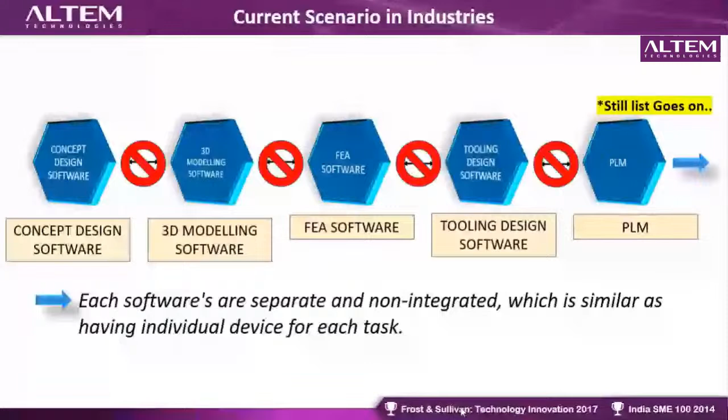There was a separate software for concept design, separate software for 3D modeling, separate software for FEA, which were not interconnected with each other. Now, because of this 3D Experience platform, which has been developed by Dassault Systèmes, all the softwares can be integrated, and all the departments in the companies can work in a collaborative manner to design the products faster and get the product out in the market as soon as possible.

Before the introduction of 3D Experience, all the products were available as a single software to the customers. Now imagine a company like Ashok Leyland or Tata or any of the major OEMs. They had purchased, say, 50 licenses of Catia for design, 25 licenses of Simulia for simulation, and say X number of licenses of Delmia. Each one of them was not interconnected, and they were working in individual silos. So collaboration between the different teams was a huge challenge.

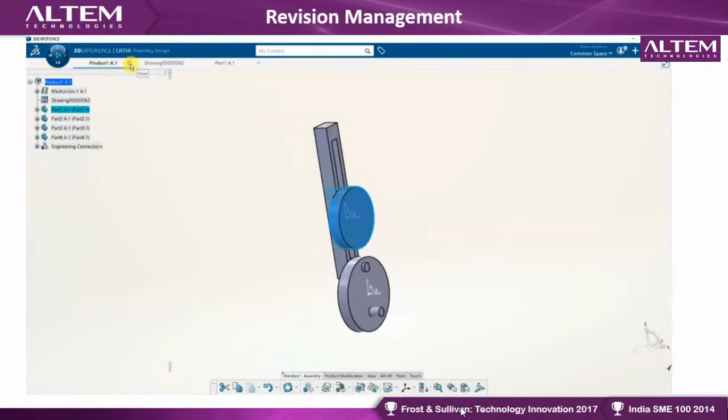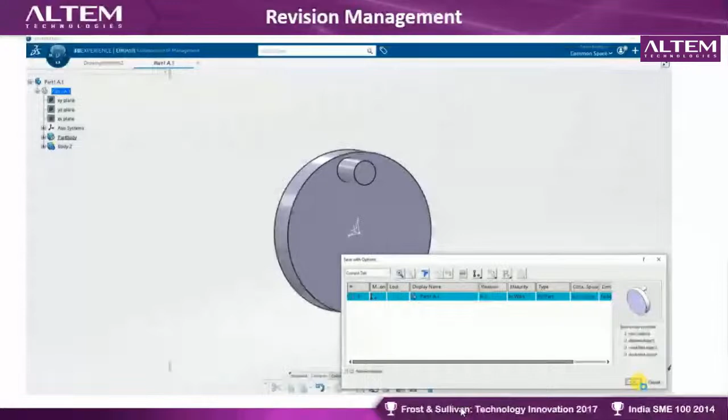By default in 3D Experience, the revision is set for a new part as A.1. The A is the major revision, 1 is the minor revision, and it is reflected in the draft, in the BOM, in the drafting. Now, if we need to do any changes to the part once it is released, we need to do the changes via revision management in any PLM. Here I want to change the diameter of this particular part, so I will do it via revision management, where I will change the revision of the part from A.1 to B.1.

As you can see on the screen, the methodology is how it is being done. Now the revision is changed from A.1 to B.1, and I am doing the necessary design change.

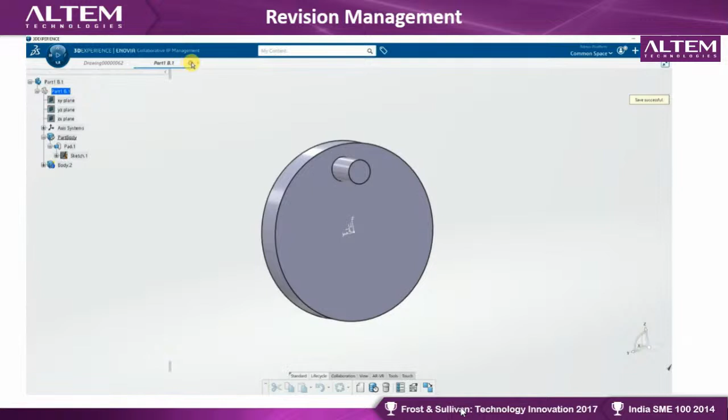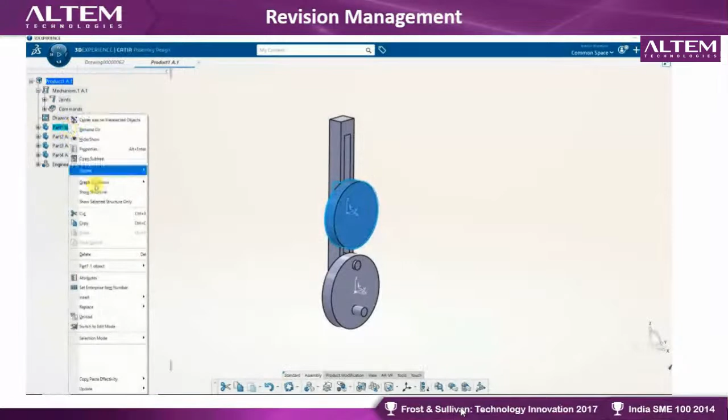Once the revision of the part has been done, we have to change the part number in the assembly as well. So in a particular assembly, there might be different products with different revision numbers. Once we update the revised part in the product, it will be available for all of them in the team to look at it, because now everybody is connected to the same platform. Once we make the revision and update it in the assembly, everybody can see which part revision is being used in the particular assembly.

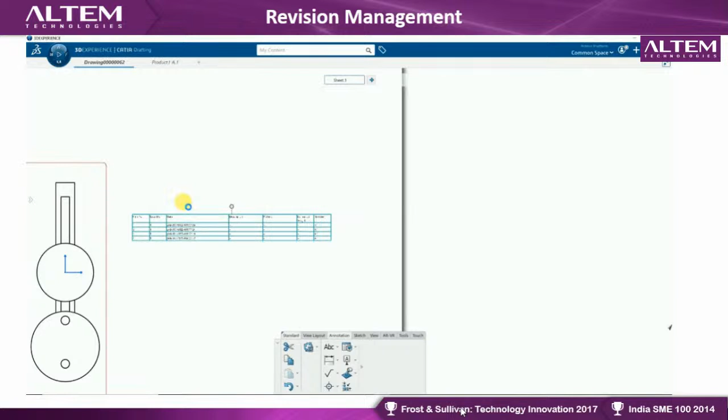And of course, we can update the BOM as well, so that in the BOM we can see which revision part has been incorporated in a particular assembly. So this is how the revision management works in the 3D Experience platform.

Next, let us come to issue management. As I explained earlier, if an issue has to be raised by the project manager, the project manager will have access to check the final product, and this is before the component is frozen. They communicate what changes are required in the model, and they can raise an issue very quickly. They can use the 3D markup feature to highlight the area of the issue.

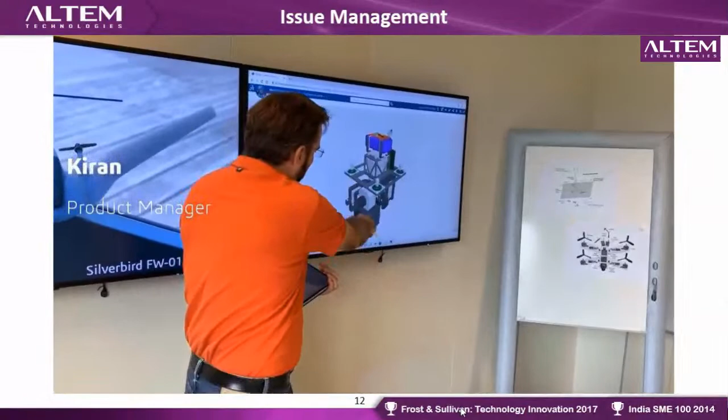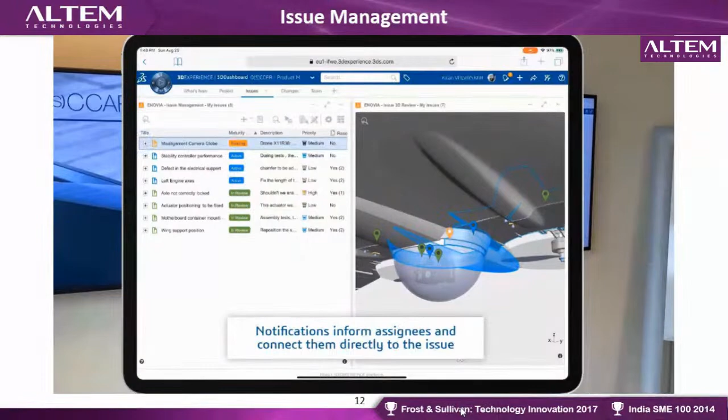They can make some remarks, write some comments, and assign the job for rework to the different resources in the project management application. As soon as the project manager assigns the rework or issue, the team members will get a notification, and they will have a look at the comments of the 3D markup application, and they need to work on the design change.

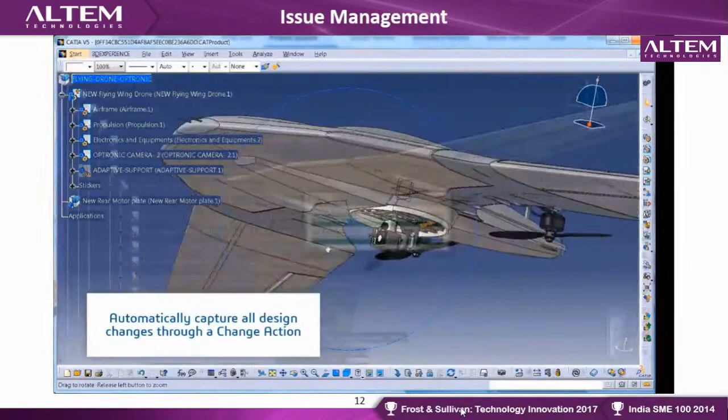So now it will be forwarded to the respective design engineers. They will be given the proper access to the parts where they will do the necessary design changes. Once the design change has been done by the design engineer, the maturity status moves from in work to approval.

Now it is up to the product manager whether to move it from approved to complete or send it back to rework. Different people in the organization will have different rights, read or write access rights, and all that can be controlled by the admin. And now the issue has been resolved, and now the maturity is in the complete state. This is how very easily the issue management activities can be tackled using the 3D Experience platform.

Coming back to the solution, 3D Experience is available in two different configurations. The first one is 3D Experience on premise, where the customer needs to install and maintain the hardware for the server. For data security, Dassault Systèmes has made it mandatory that the data will be stored in a database.

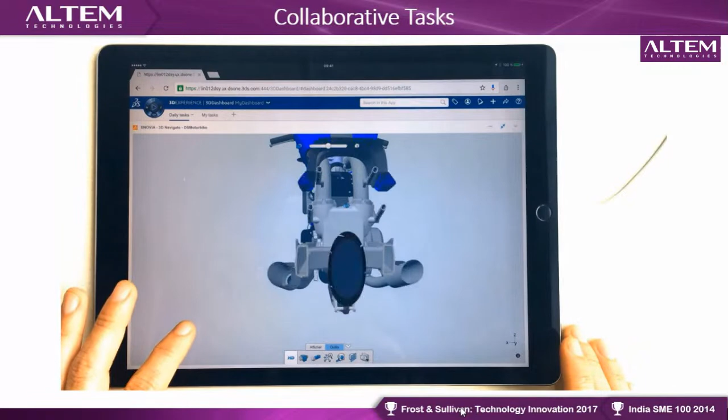So here the managers are reviewing the part and have identified that some design changes are required. In this example, there is some change required in the design of the silencer. So the project manager can simply assign the task using the project management applications, and assign the job to the particular resource.

As soon as the managers assign the job to the resource people, the notification goes to the design engineers. These things can be easily configured if customers are using on cloud, and it is a bit of a challenge if it is on premise.

Now the design engineers can view what job has been assigned to them on their mobile phone itself, using the 3D Play application. They can understand what job has been assigned to them.

As you can see, for this particular user in this example, only access to the silencer has been given to the engineer. This is possible via giving proper read and write access, and all this can be controlled very easily by the administrator of the company.

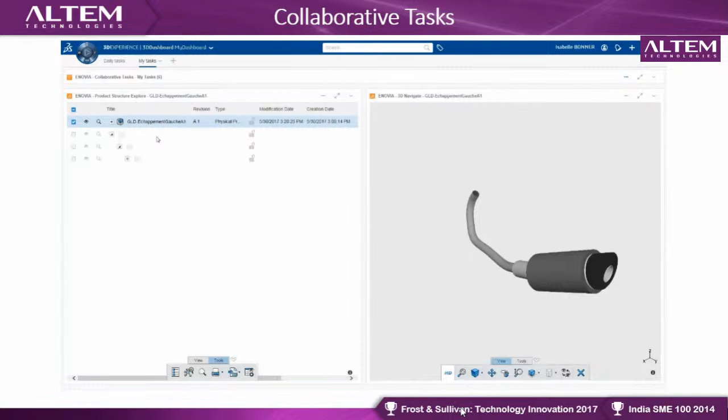Now for the user to start working, they would need proper hardware and the modeling licenses. In this case, the user is comfortable using the Catia V5 software, so the design engineer will make use of Catia V5 itself to do the modeling work. He or she will connect to Catia V5 using the Catia V5 connector.

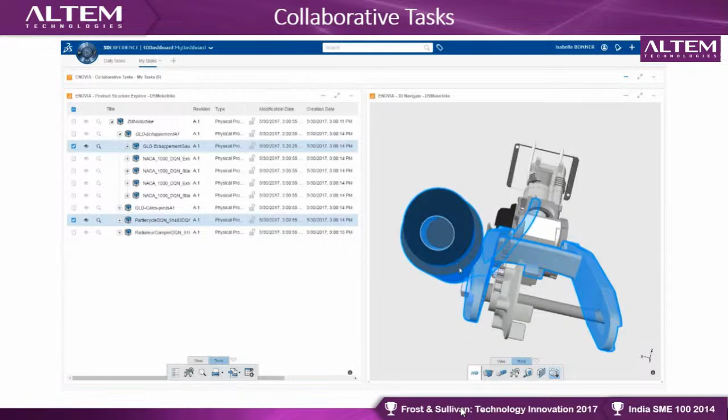This is 3D Play, where she is still assessing what needs to be done. Now she will open this part in Catia V5. She will make the required design changes, and save it on the platform.

Once the updated design is shared on the platform, all stakeholders can see the changes made by the design engineer. Now the design engineer will move the maturity status of the part from 'in work' to 'in review.' It is then up to the manager to either approve it and move it to the complete phase, or send it to rework. This is how collaboration can be easily done using the 3D Experience platform.

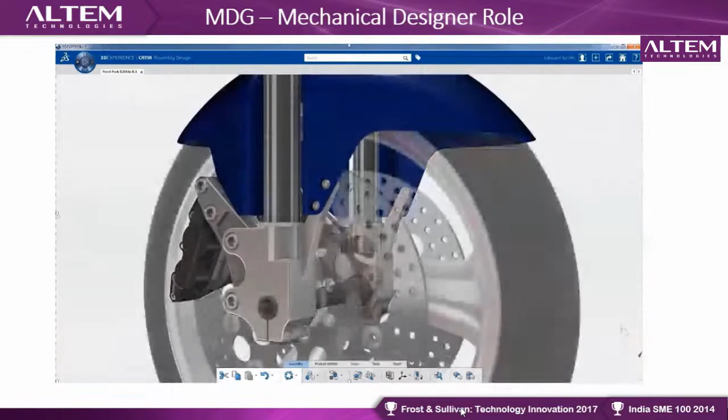Now I would like to show a glimpse of the 3D Experience Catia software, for the MDG or Mechanical Designer role. I have put this video so people can see the interface of how 3D Experience Catia can be useful.

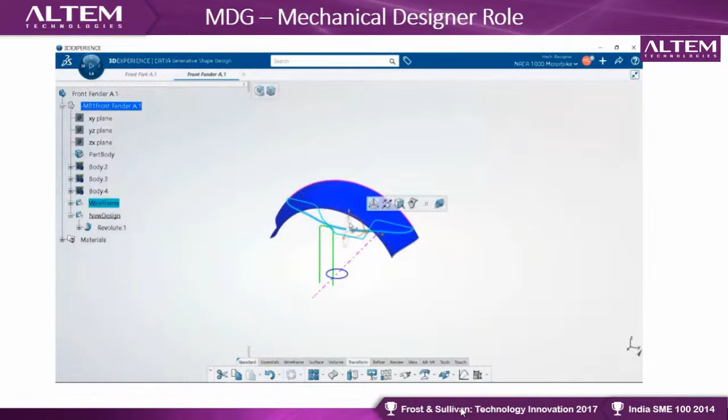As usual, once the company adopts 3D Experience, the PLM features are available to the user. Now there is a change in the interface compared to Catia V5, and the dashboard and interface are much cooler and much easier.

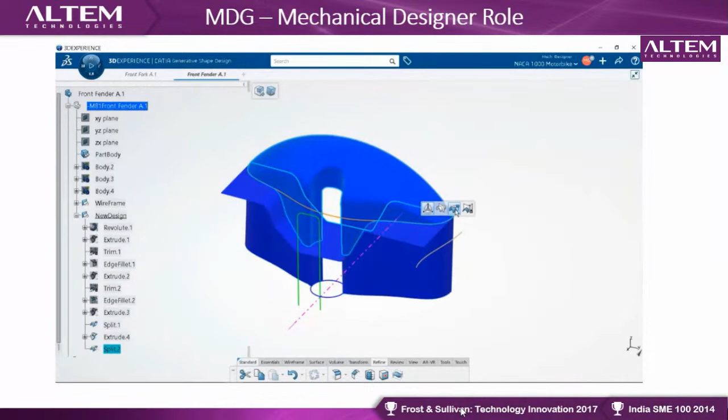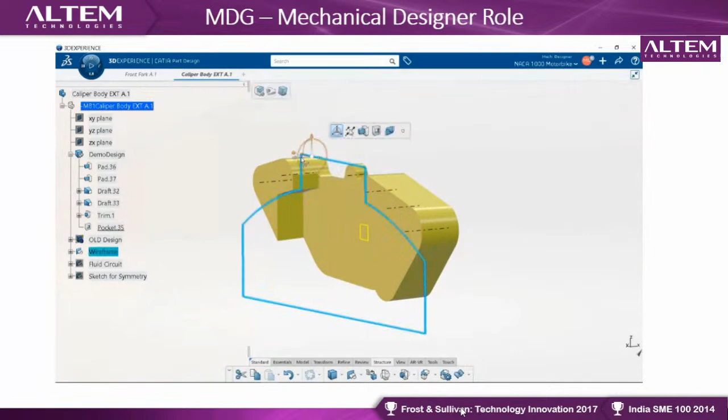The method of design is drastically improved. Users can make use of this contextual toolbar to create or modify designs in a quick and efficient manner. All toolbars are now placed in a strategic manner, and this contextual toolbar is very easy to learn, so designers can work on the model very quickly. This saves a lot of design time. I'd like to point out that all the commands present in Catia V5 or SolidWorks have been kept the same.

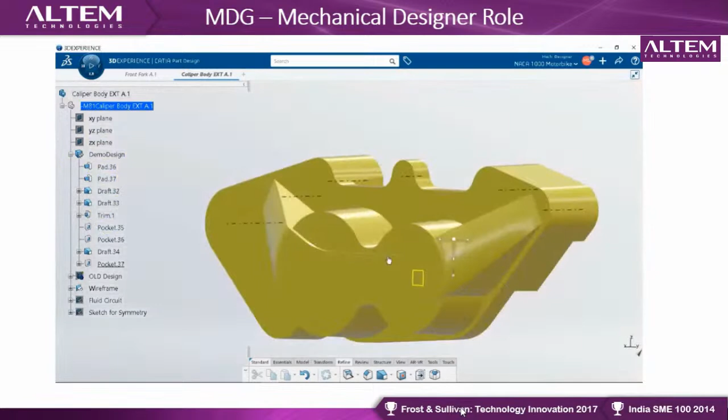There is no addition or deletion of any particular commands. Even the principle of mechanical design engineering is the same. It's just that the interface has been updated, and design engineers can now work very quickly and complete the work in an efficient manner.

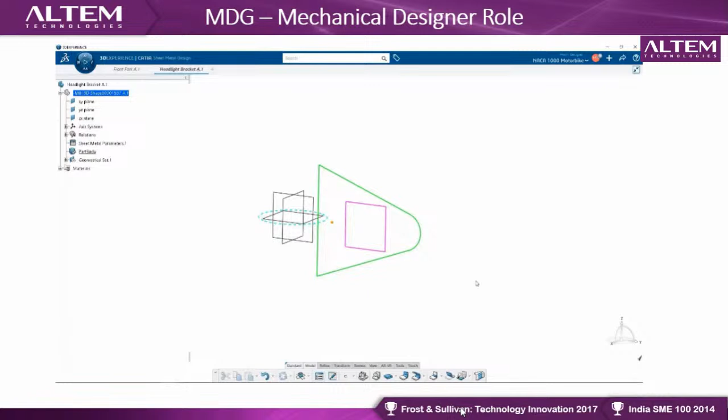Even the sheet metal workbench, they have made some good additions where once the sheet metal part has been designed and before sharing it to the manufacturing team, they can set the sheet metal order process. This will help to understand what different features can be done at different stages.

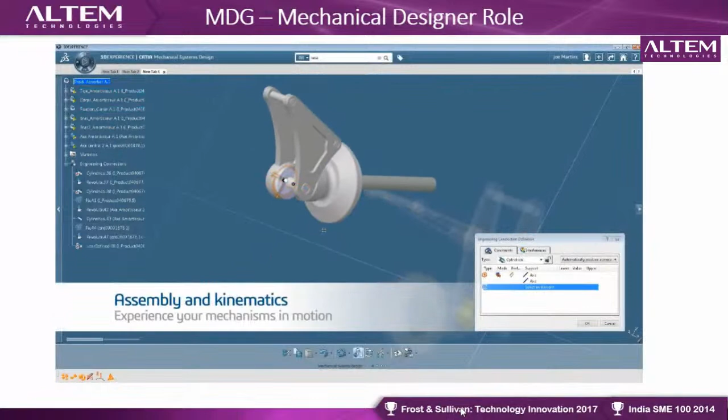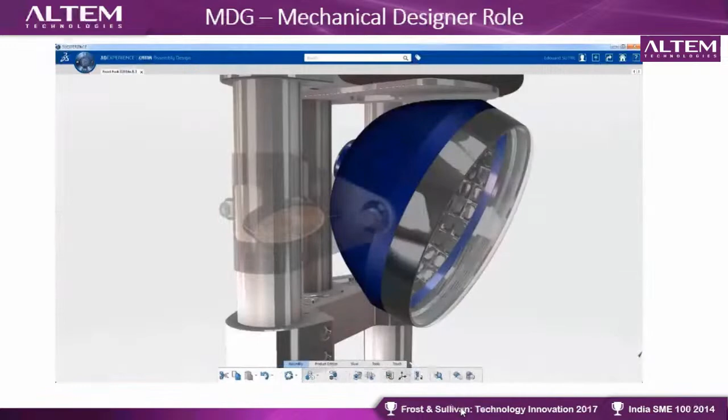And in 3D Experience Catia, the assembly design and the kinematics have been integrated together so that the assembly design team can now quickly do the animation of the assembly which they have created to check for clashes and interference. All of this has been taken care of and closely associated with PLM. All the E-BOM, M-BOM can be very easily generated with a click of buttons.

So this 3D Experience Catia combined with PLM is unlocking a new power. So this is what I had to present today.